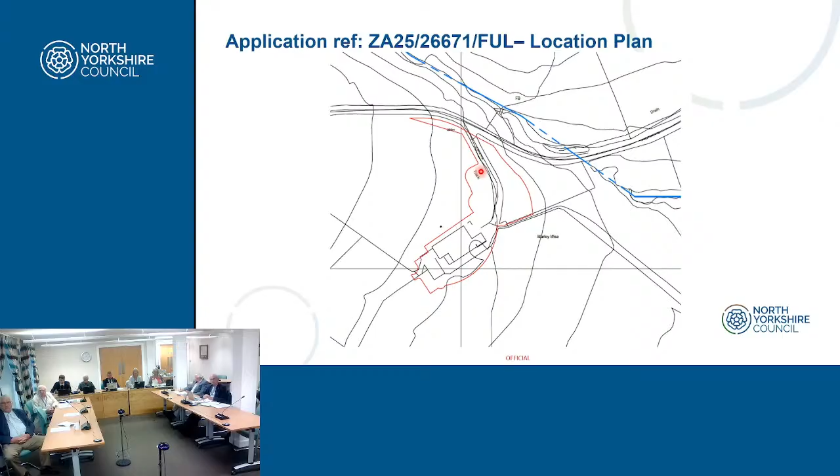So the existing site includes the existing access off Wally-Wise Lane, the access road to the existing buildings here. You've got an existing public right-of-way that runs down the access, but this is subject to a diversion order. We've got an application, but it's currently not in progress because we're awaiting the outcome of this proposal. You've got the existing farmhouse, on the eastern side of the development, and the remainder of the barn buildings with the part demolished end extension - it's got a front wall, and that's probably about it - with the existing steel portal frame buildings to the north.

Here you've got the existing silage clamp, which has obviously been disused for a number of years now. The council has a record of about 5 to 8 years where this site has no longer been used for the farming enterprise.

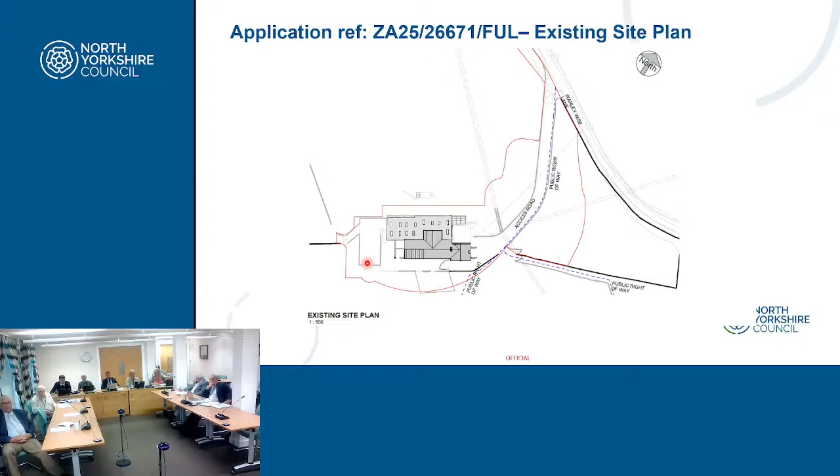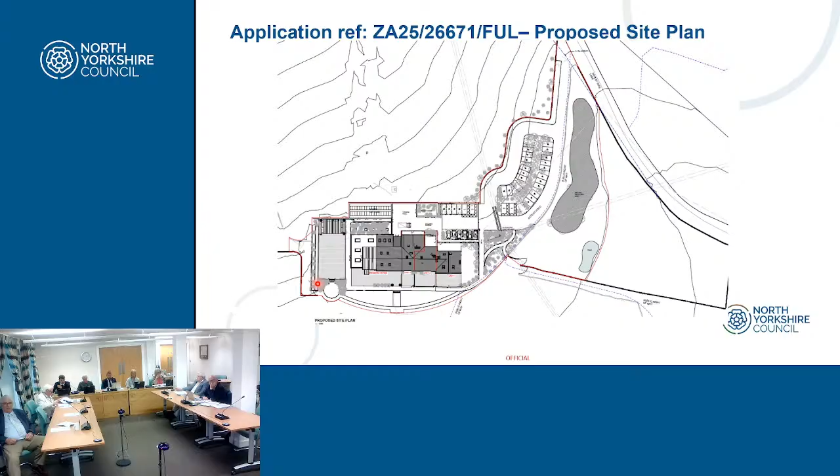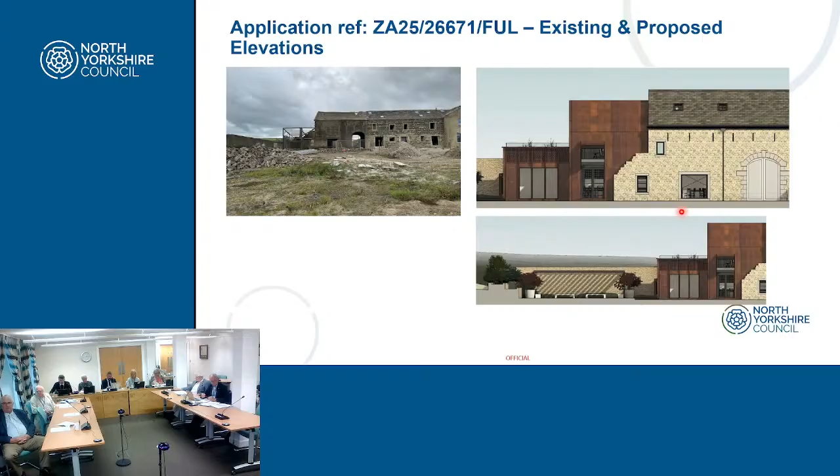This is the southern elevation of the building. The existing broken wall is being retained on the proposed southern elevation, with the rustic steel extension set below the ridge, and the openings facing southwest, then the openings on the west elevation down here.

These three openings are existing, with one new opening within the external wall to the first floor, plus two Velux roof lights in the roof.

This is a section of the outdoor seating area. You can see it's planted to screen it from views from the west, and it's set down slightly at the same ground floor level as the building to help screen it.

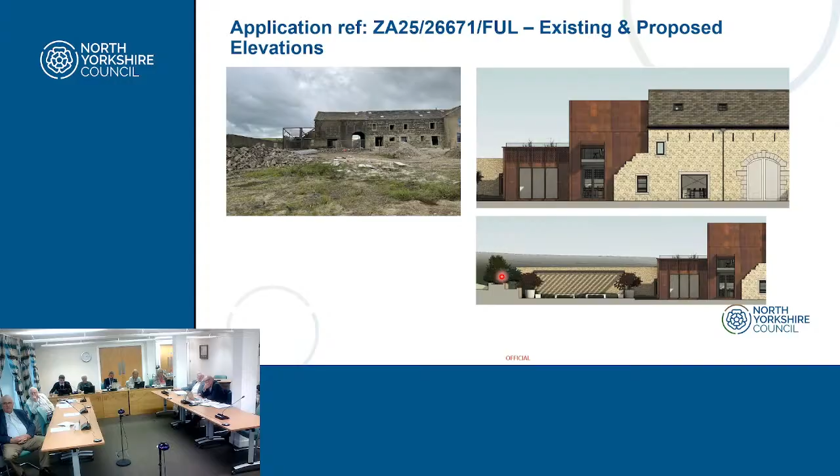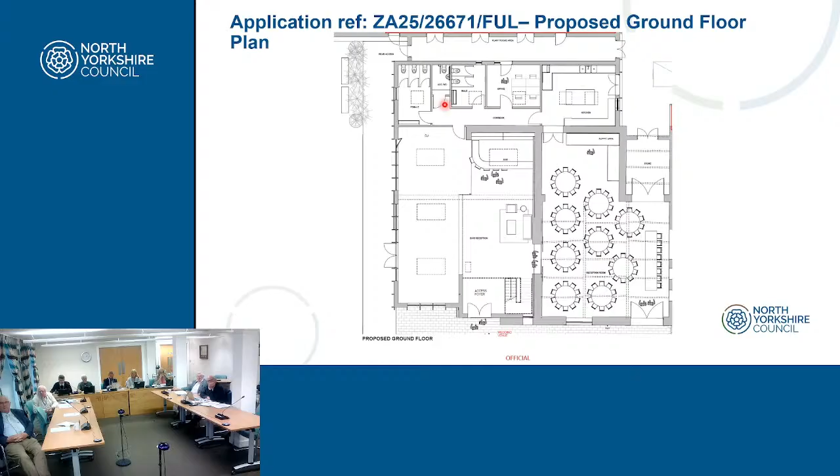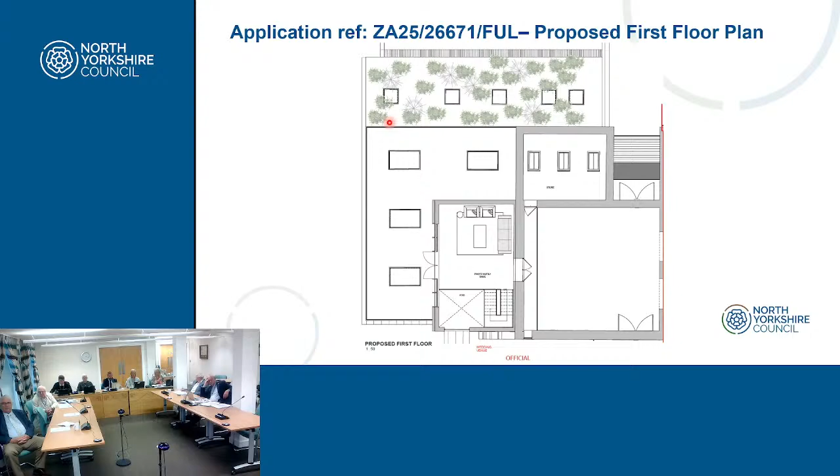A snug area allows photographers to take pictures of the events going on, if anyone wants photographs. There's also access to the first floor area with a glass balustrade for health and safety, to prevent anyone falling from above.

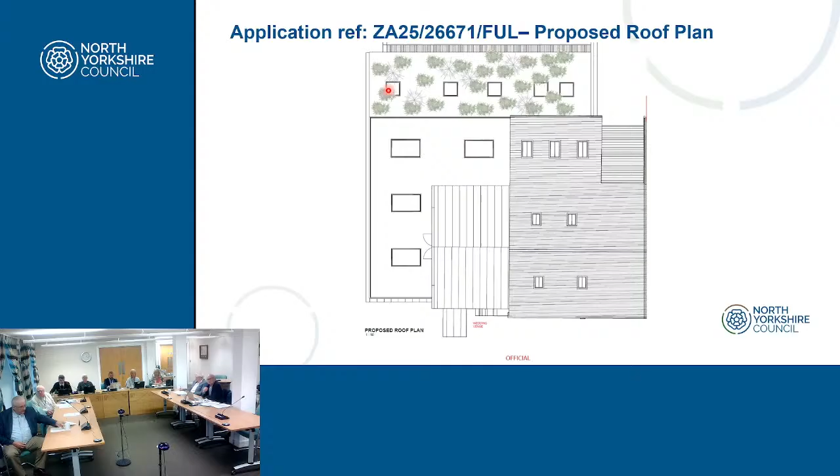This is a similar plan showing the extent of the roof works. This section is the two-story steel structure with the first floor extension, and then the green roof to the rear of the application site.

These are the plant rooms located on the northern boundary. As you can see, there's storage, generators, battery and electrical equipment, and refuse areas in the northwestern one.

This plant room is to have the solar array above. The smaller of the two plant rooms is for the air source heat pumps, and there's also water storage, though I'm not sure what the central one refers to.

Here's the retaining wall with the fields beyond, which are going to remain as they currently are, and a turning area for deliveries and for people arriving by car who need extra space to turn around and drop off.

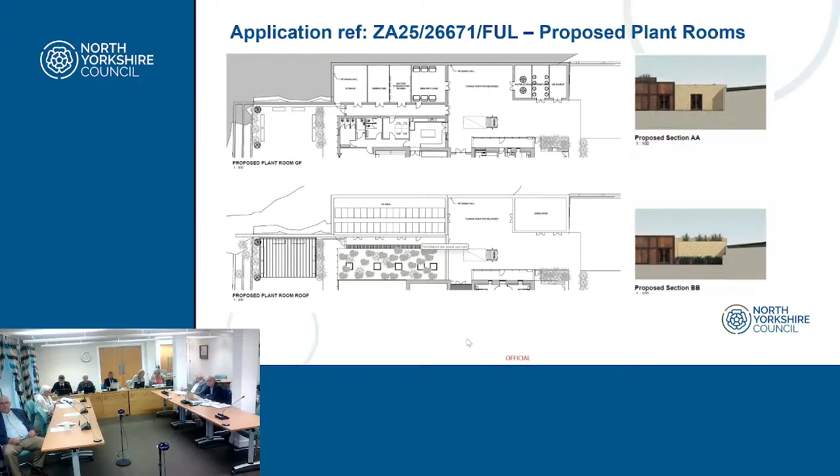Turning to the lighting plan, the majority of lighting throughout the site is shown as small dots, with a key here. Most of it is low level and bollard lighting, predominantly located in the parking and access areas, with additional occasional floodlights on the southern elevation of the building and the outdoor seating area.

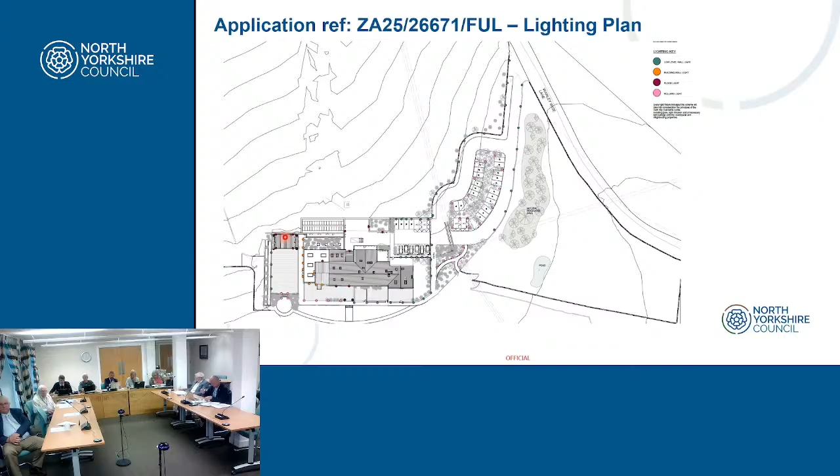Turning to the landscaping within the site, there's a woodland area to the east with a pond beyond, a small area of woodland planting here, and some turfed areas throughout the site to encourage biodiversity net gain.

There's intervening planting between the car parking areas, a new turfed area of grass with wildflower planting beyond, the green roof, and new lawn and tree planting along this section. To the southern elevation is a mixture of wildflower planting and turfed lawn.

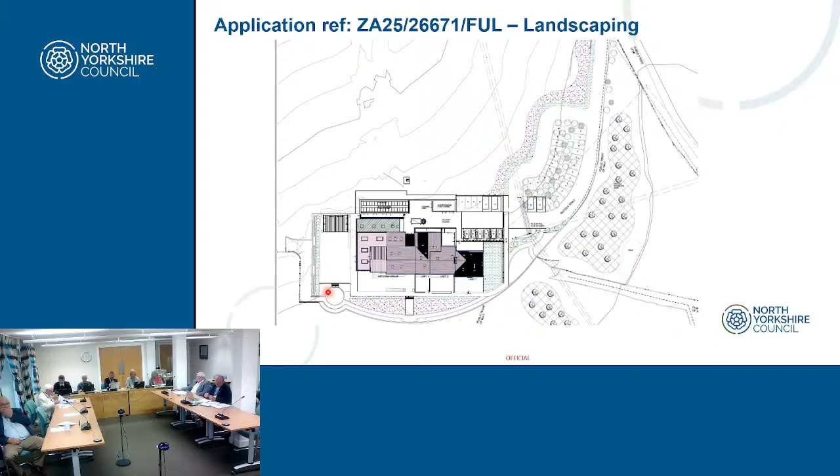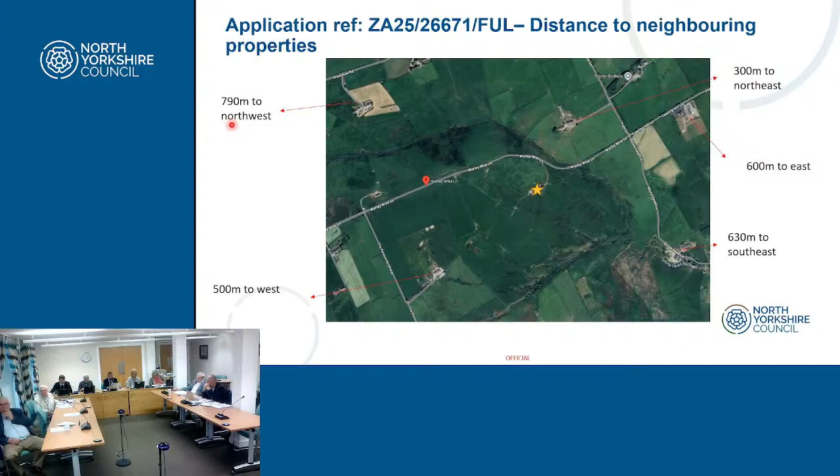So turning to the amenity side of things. The application site is the star in the centre of the screen. The nearest residential property is 300 metres to the northeast, and they get further away as you go around the site. The two Grade 2 listed buildings are 630 metres away, with the agricultural application site on top of the hill. The furthest dwelling is 790 metres to the northwest.

This is the fallback position of the site. The red shows the existing farmhouse, which was vacant due to fire damage and is currently being restored. The two central units have planning permission to be used as residential dwellings, and the existing use of the application site has been changed under permitted development, Class R, to a C1 use, which is a hotel.

This is the internal area considered to be used as a C1 use, and then the curtilage relating to that C1 use. This was done under permitted development, so no application was needed to convert the barns from agricultural to C1. The only time we would need an application is for any proposed alterations required to this barn.

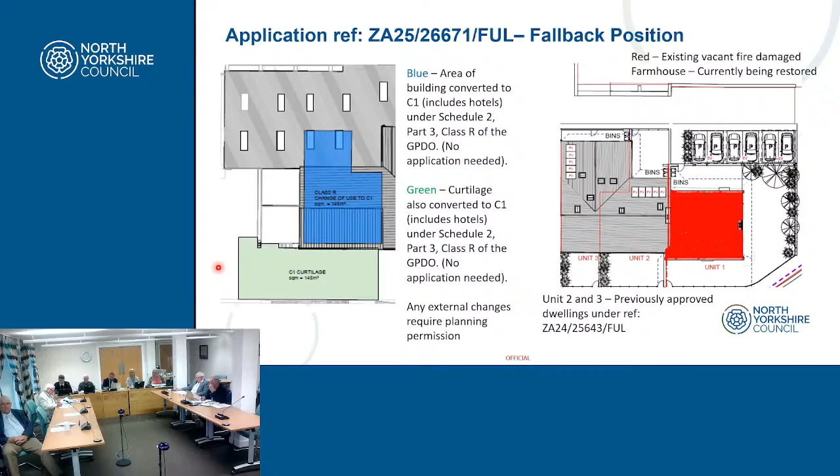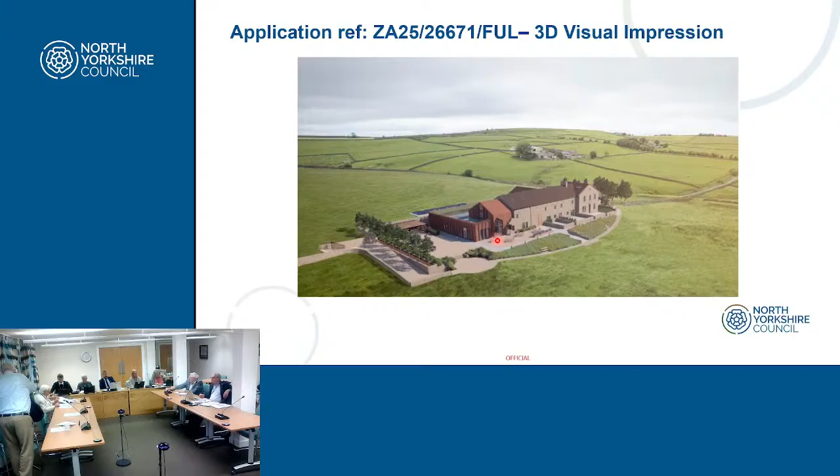Thank you, Chairman. Just two or three, Mr Holmes. What would you say is included in the definition of events stroke weddings? I understand what a wedding is. Yeah, so events surely is a bit open-ended. Does it include music festivals, raves?

Can I talk? So the events wouldn't include things like music festivals, etc. It's more commercial business events, like conferences for external businesses wanting to bring new ventures to this part of Craven.

I've got no record of when it was last used, but from previous applications spanning from 2021 to the current date, and from the few visits I've done, there's been no use of this as a working farm. So I'd estimate it's probably been 5 to 8 years based on the evidence we've got.